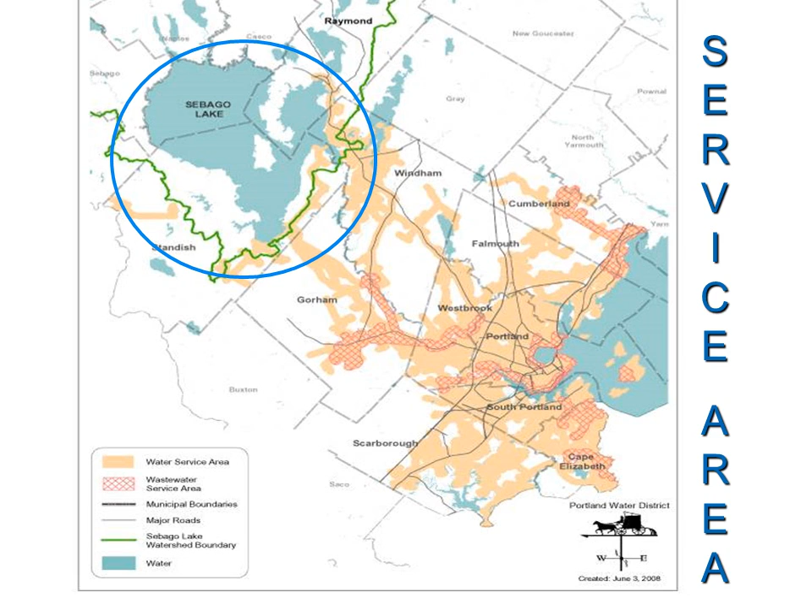Here's the source of our drinking water, the very, very pure and pristine Sebago Lake. We have one water treatment plant in Standish, noted by the red circle, and that water serves this distribution system that's included in this purple oval. The solid orange color is the water service area, and the hatched reddish color is the wastewater service area. We have one other small water system that is served by wells in Standish.

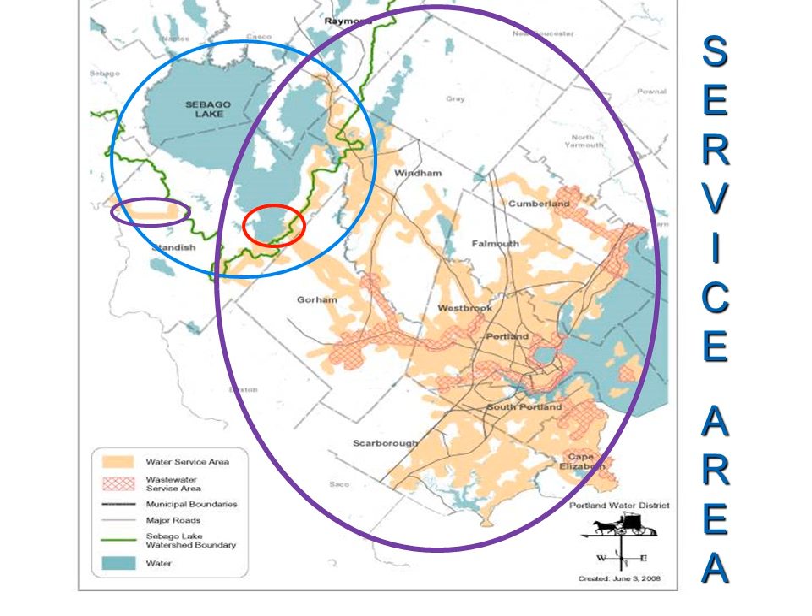Working from Sebago Lake, we start by protecting the lake to optimize our water quality. We monitor the water quality, we ensure the security around the lakefront, we inspect properties and potential contamination sites to make sure that the lake is protected, we educate, we acquire and preserve land, and we conserve the environment.

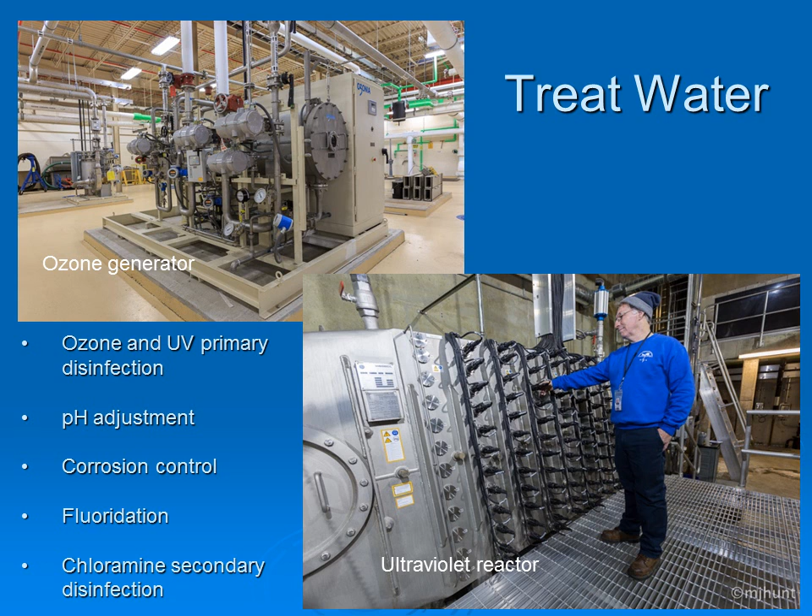We treat water at a water plant up by Sebago Lake. We have ozone and ultraviolet light as the primary disinfection. We adjust pH, control corrosion, fluoridate the water, and use chloramines as secondary disinfection. This is a state-of-the-art water treatment process that is run very efficiently and effectively and gives great value to our customers. Because Sebago Lake is so clean, we have a filtration waiver from the EPA, and that means that we can treat our water with these spectacular processes without having the expense of building and maintaining a water filtration plant.

I wanted to emphasize to you the enormity of the job that Portland Water District does to get the water from that lake to your tap. It's a complex system, it's challenging to see it and fix it, and it's costly for operating and maintaining it. So keep in mind, this is water for drinking water and for fire protection, and the fire protection is a very, very important part of what we do.

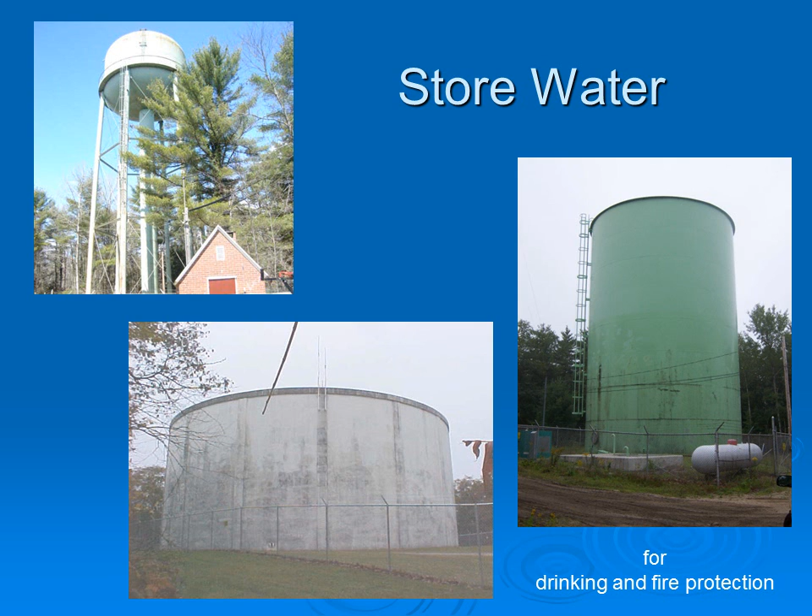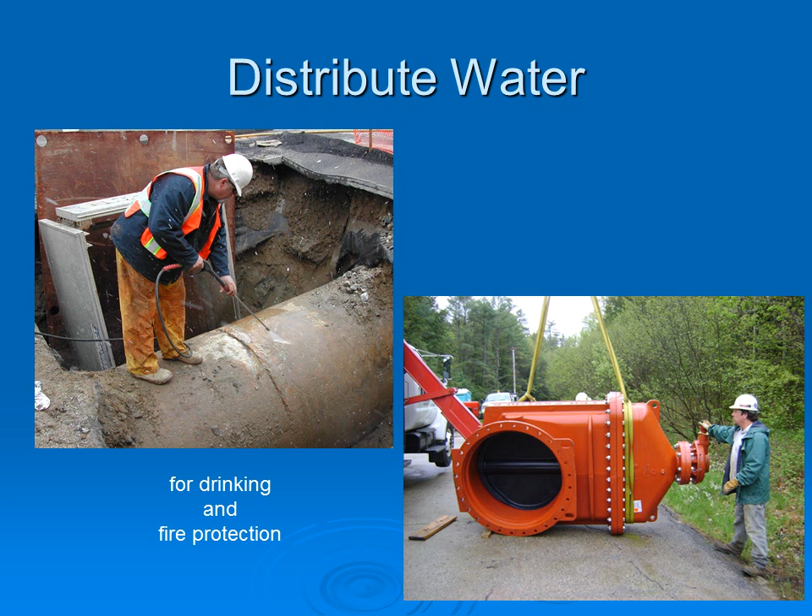The district has 6 booster pumping stations. We have 10 storage tanks, and we distribute water through 1,000 miles of water main, from large mains like this and large valves like this to smaller mains and smaller valves. The district operates and maintains 11,448 valves and over 5,000 hydrants.

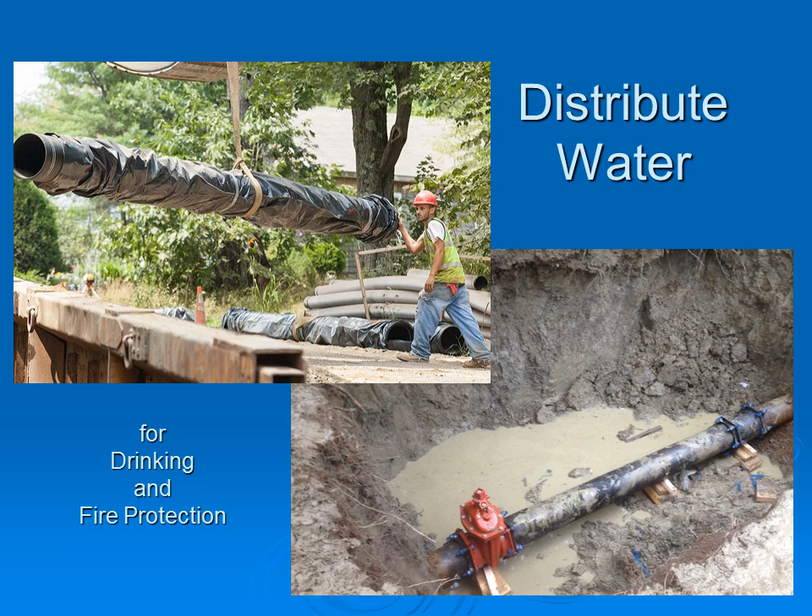This is a general map of the water distribution system. The darker, thicker pipes are the larger ones. They start up at the lake, work their way down into the various communities where the water mains get smaller and more dense. It's a very, very complicated system.

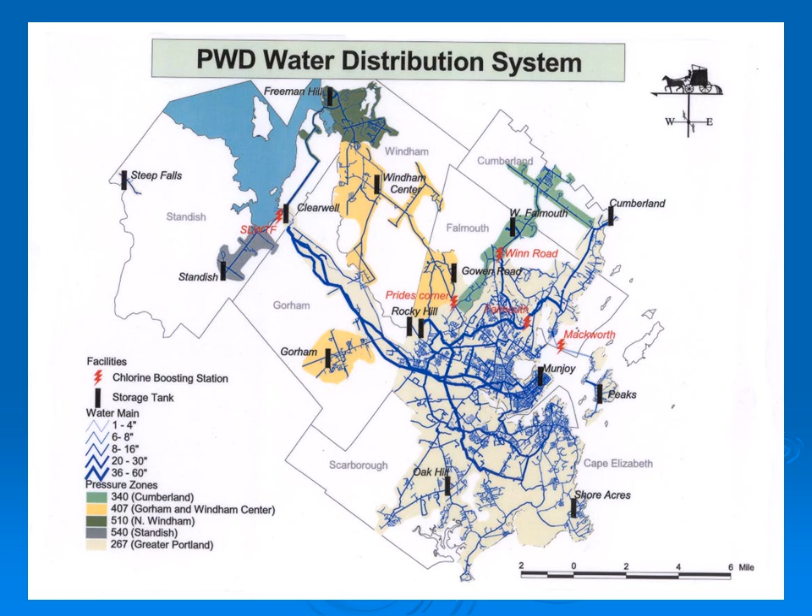Another important part of our work is that we ensure that the water served to the public is the highest possible quality. We have real-time monitoring of our treatment processes, regular testing throughout our service area. We do over 15,000 tests a year to ensure that the water quality is the highest that it can be.

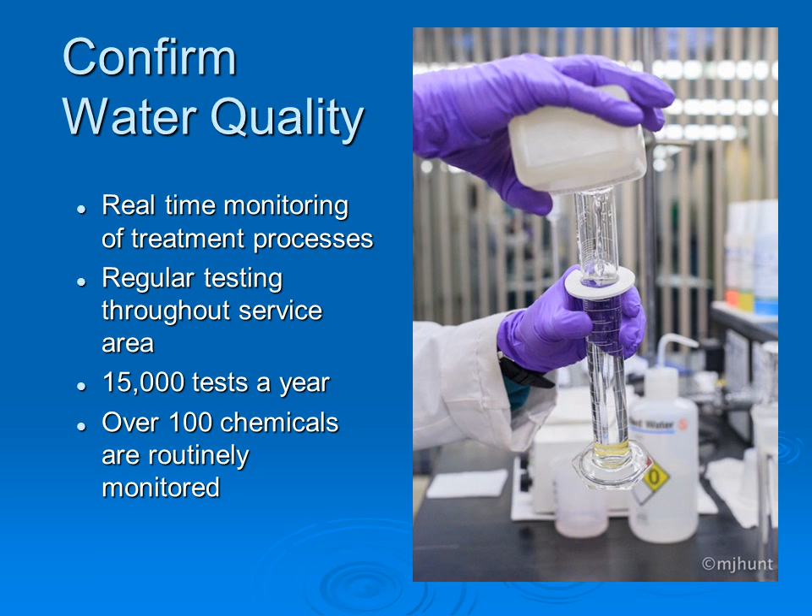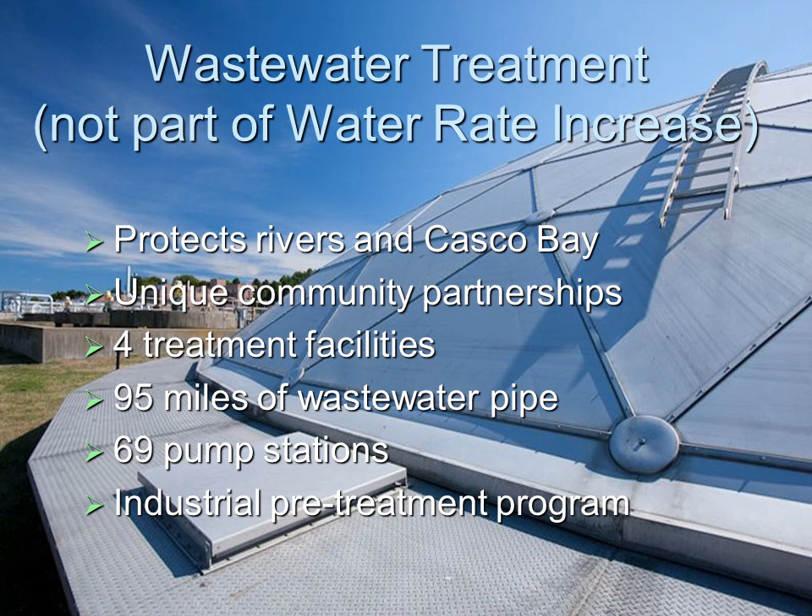So if we're looking for a water rate adjustment for 2019, here are the things that we think about that we want you to be able to understand. How much revenue will the district need to operate? How much do we want in reserves? How much water do we expect that customers will use? And then once we figure this out, how will we allocate this rate adjustment to customers and what will these be? So Portland Water District for 2019 will have a total of $25.2 million worth of expenses that we need revenue to cover.

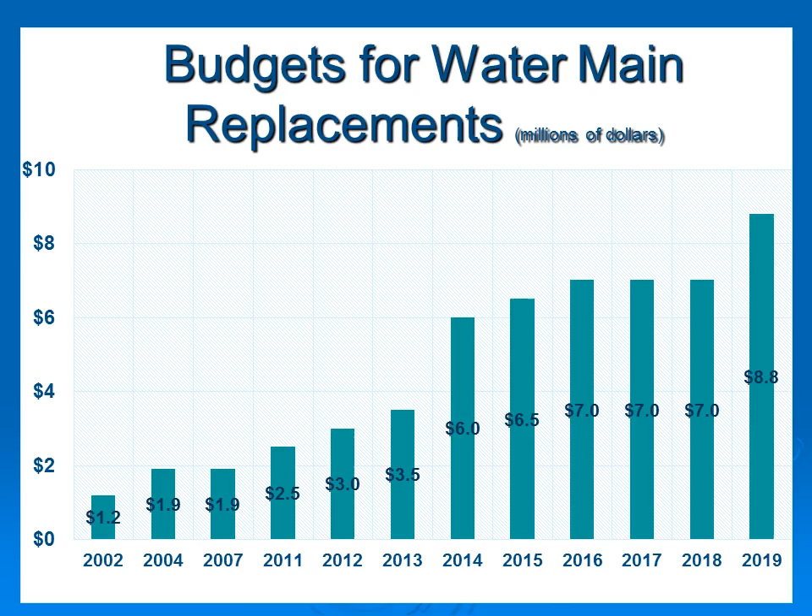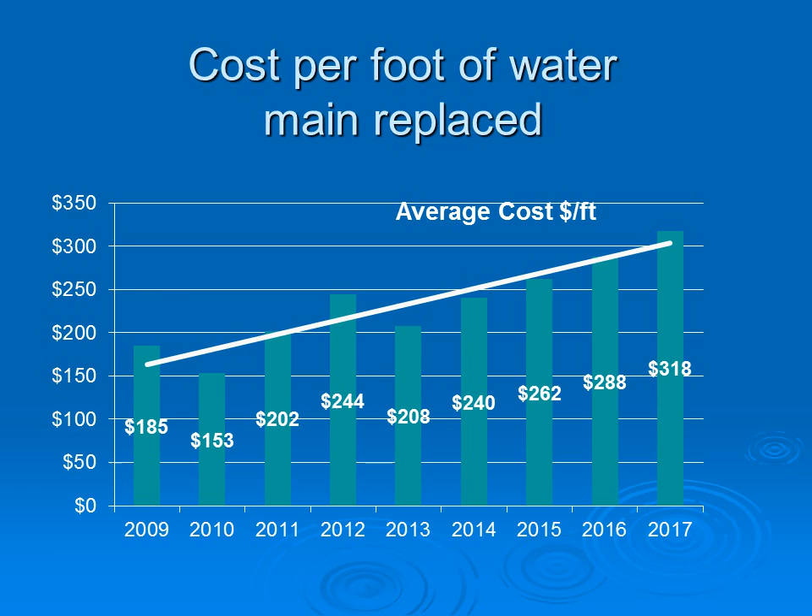Regrettably, the cost per foot of water main that's been replaced has been steadily increasing over the past dozen years, from $185 per foot in 2009 up to $318 a foot in 2017. So that's increases in labor and materials that are required to put water main in the ground. Of course, that means that the money that we're spending for water mains doesn't replace as many miles each year as it would if the price was stable.

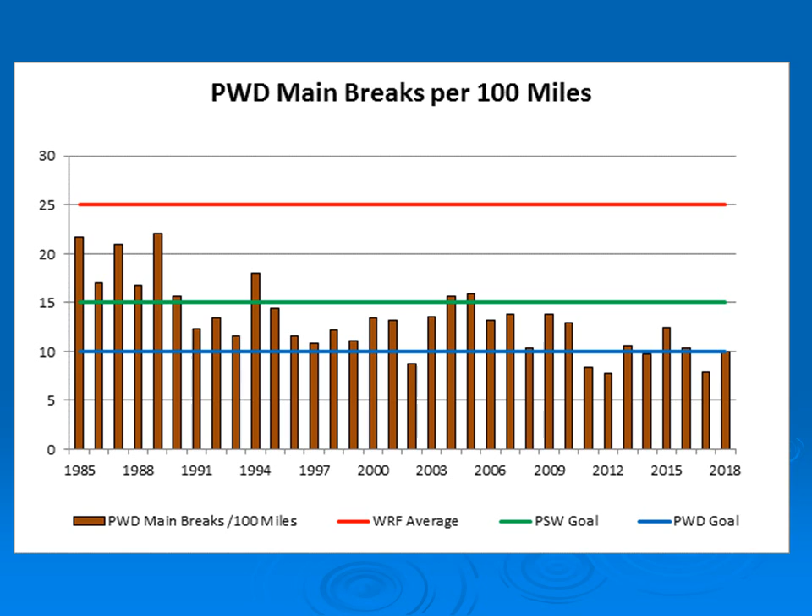However, the effort and the money that is being spent to replace those water mains is working. You can see that in general, these water main breaks per 100 miles, the brown bars, have been decreasing overall since 1985. And we stay way below national expectations and benchmarks, and our goal, which is the blue line, we're doing a very good job of getting to and staying at, and that is a combination of that good investment and good operation. So let's go back to this slide and look again.

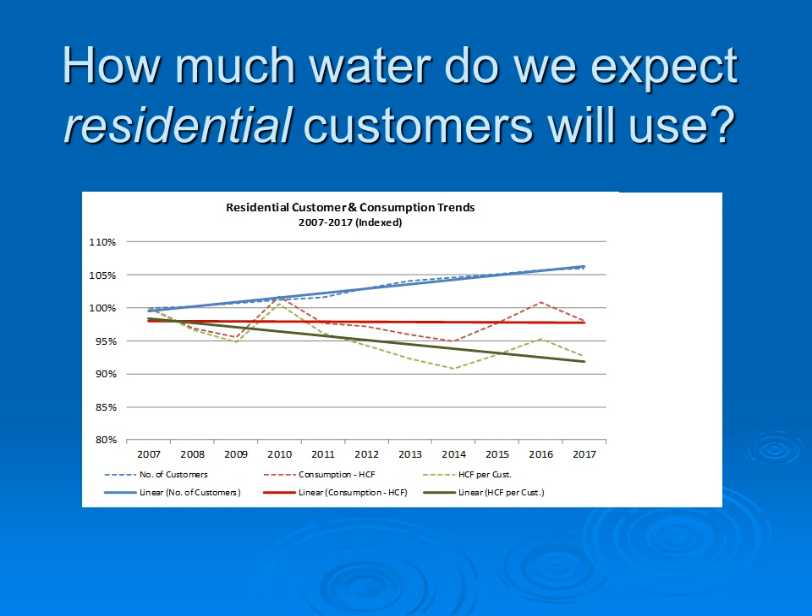In order to figure out how much water we expect customers will use in the next year, we analyze the core usage, the lowest water use for 3 months, and then we add on to it an estimated usage that represents seasonal and higher warm weather use. When we do that, we end up with a projection for 2019 of 8.4 million hundred cubic feet.

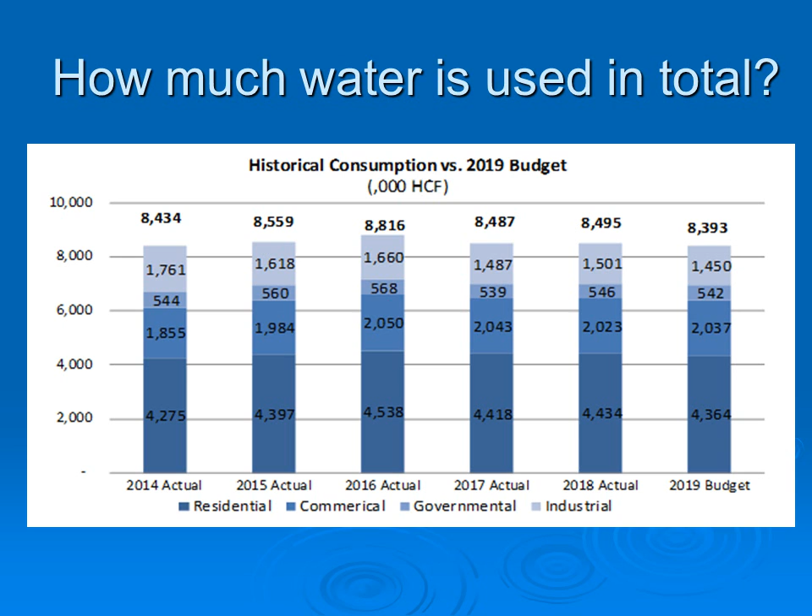You'll notice this is a graph from 2014 to 2019. The highest was 2016, which you will remember was a drought year. So the range in this graph was 8.4 to 8.8 million HCF over this time period. So we've used a conservative estimate of 8.4 million for our rate structure.

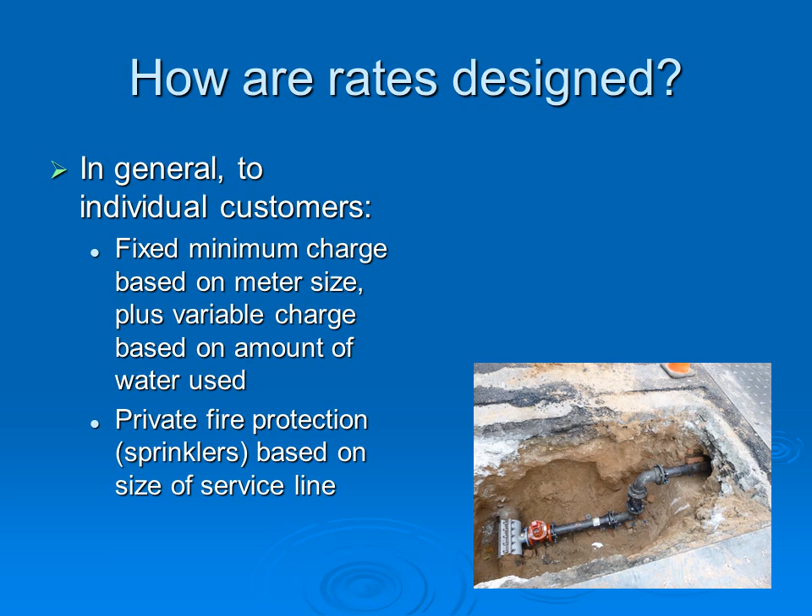So how do we design rates? There are different kinds of rates for individual customers. If you're one of our customers, you get a fixed minimum charge that's based on your meter size, and you also get a variable charge that is based on the amount of water that you use. Some residential individual customers will get private fire protection charges, which are basically sprinklers in their building, and the charge for that is based on the size of the service line.

Communities get a fire protection charge that is based on the hydrants and the water mains that are available for fire protection activities should they be needed. There are also rates for seasonal customers, and there are different rates for member and non-member communities.

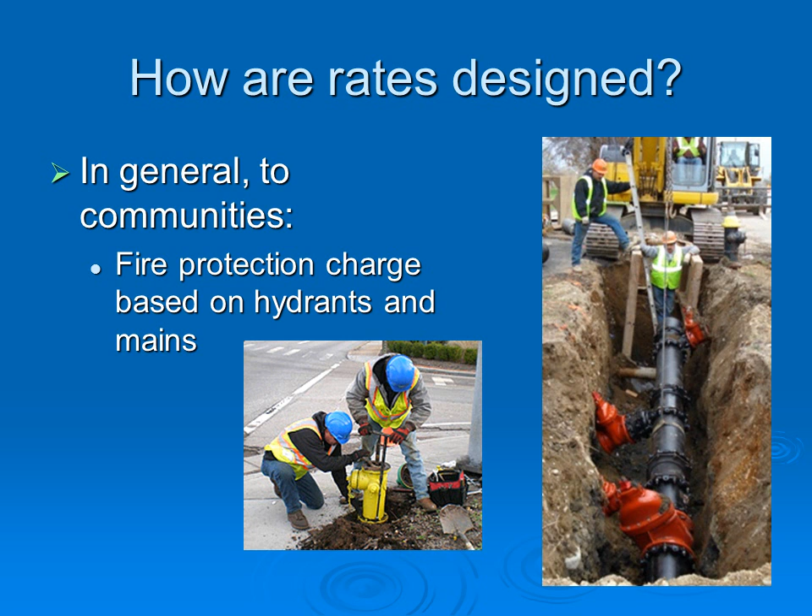So how will a rate increase be allocated? We know from a rate study some years ago that commercial and industrial customers generate less revenue than what it costs to serve them. So right now, residential customers are paying more than their share of the cost to serve them.

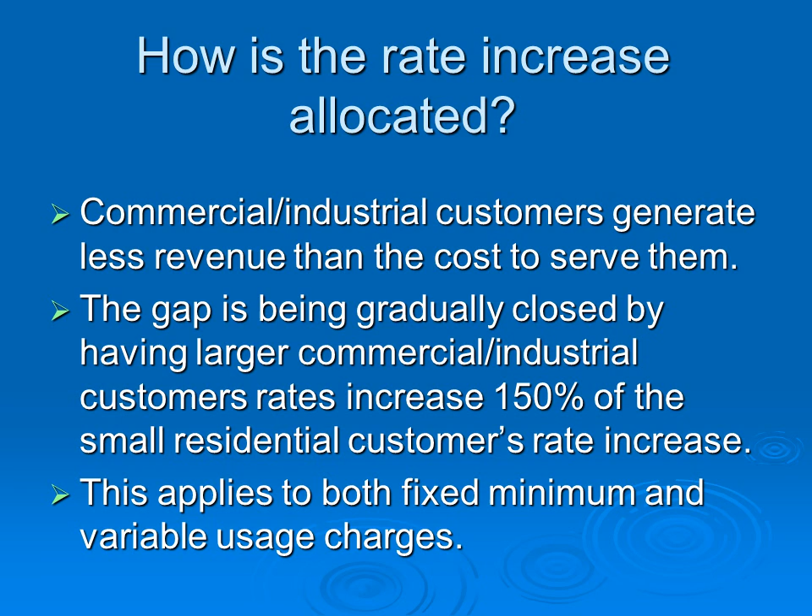This gap is being gradually closed by having a larger rate increase to commercial and industrial customers than to the residential customers. And over some period of years, this gap will close and all of the customer classes will be paying for the cost that it is to serve them. So this higher increase to the larger customers applies to both the fixed minimum and the variable charges.

What rate increase then are we requesting to cover these revenue needs? Overall, it's a 4.4% increase. It's 4% to residential, 4.9% to commercial, and 5.9% to industrial customers, like I just discussed. The commercial and industrial are getting a higher percentage increase than the residential. The seasonal customers, public fire protection, and private fire protection all have a requested 4.4% increase.

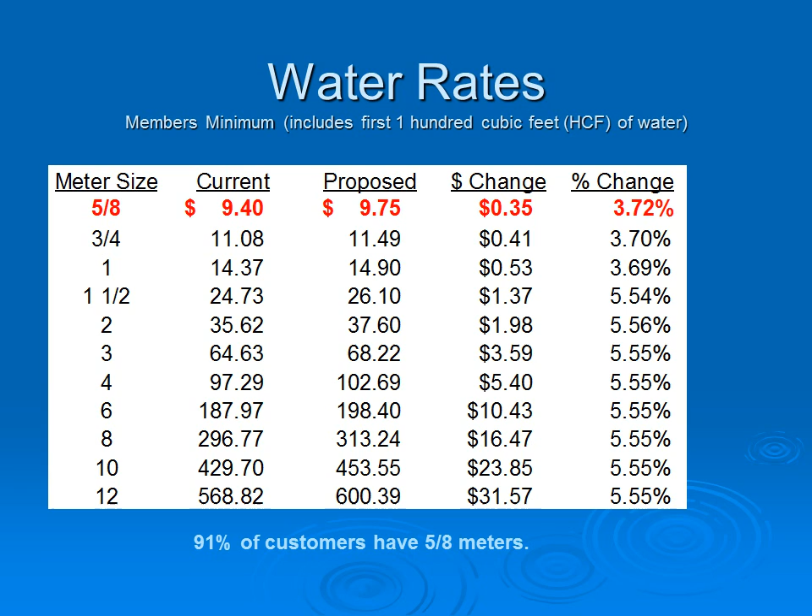So here are some of the details of how those numbers break out. This is a chart that shows the change for the fixed charge, based on the meter size. The meter sizes range from 5/8 inch to 12 inches. There's a column here that shows the current. Most residential customers have 5/8 inch meters, so currently they pay $9.40 a month. That's proposed to go up to $9.75 per month, which is an increase of 35 cents or a 3.72% change. You can see that as the meter sizes get larger, the percent change also gets larger.

This is describing how the water usage charges, the variable charges per 100 cubic feet, or HCF, are going to go up. Right now, a typical residential customer uses 700 cubic feet, so they would fit into this red line of between 1 and 29 HCF per month. Currently, they pay $2.35 per HCF. It's proposed to go up to $2.44 per HCF, which is 9 cents or 3.83%.

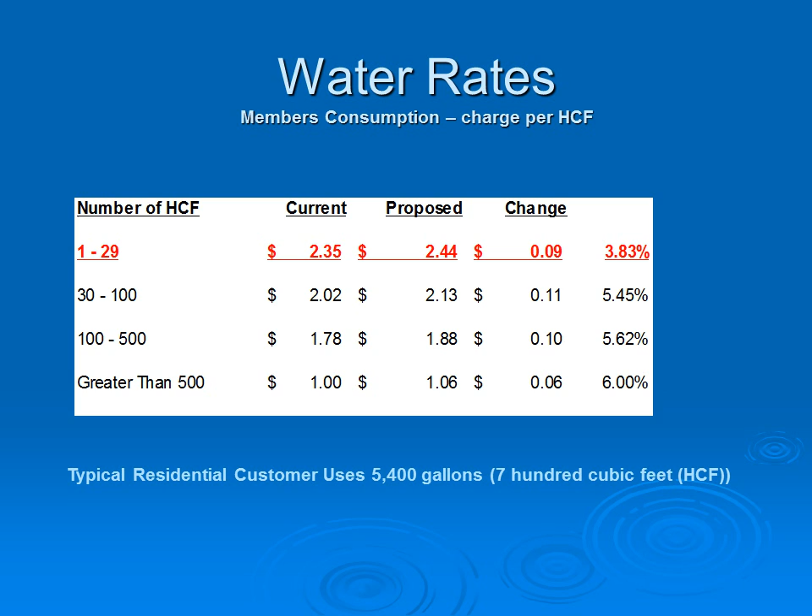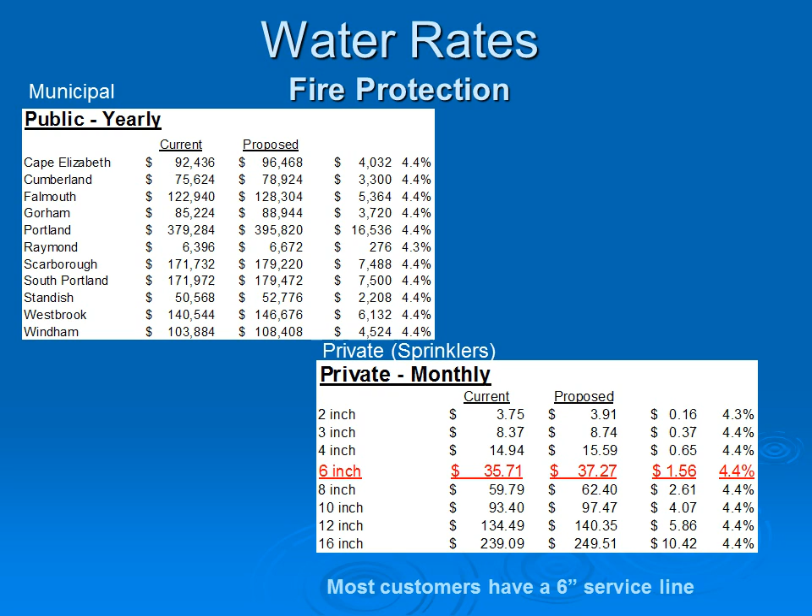Seasonal water rates are going up 4.4% across the board for all meter sizes. And fire protection rates also are going up 4.4% across the board. Again, public fire protection is charged to municipalities, and it's based on the number of hydrants and water mains that are available for fire suppression use. And private fire protection is charged to customers for sprinklers. Most of those customers that have private fire protection have a 6-inch service line.

How does Portland compare with other communities and nationally? $367 per year right now is the annual bill for a customer that uses 1,000 cubic feet. If this 4.4% rate increase goes into effect, that $367 will increase to $381 per year. This compares nationally, all the way over to the right side of this graph, to $504 per year, the national average for 1,000 cubic feet of water.

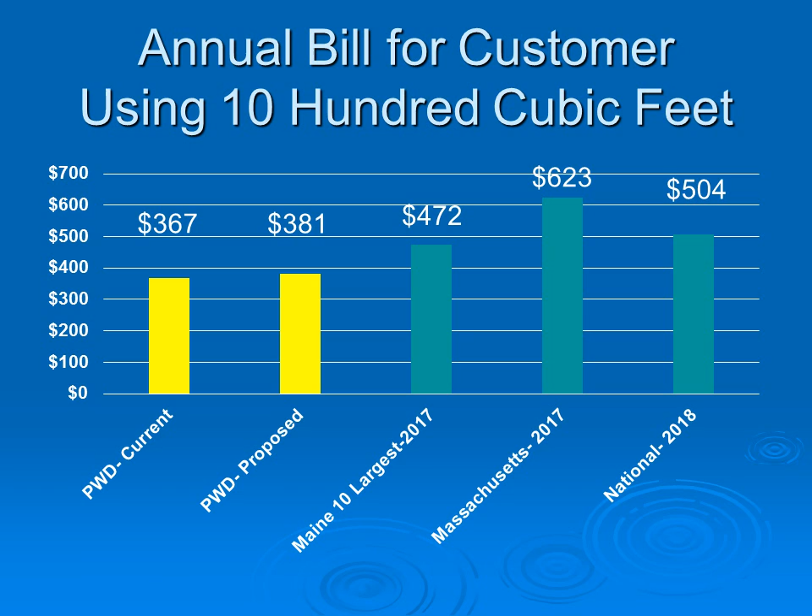The latest data that we had regionally was from Maine from 2017, that's $472 a year, and Massachusetts, also from 2017, $623 a year. So based on this, you would be able to confidently conclude that Portland Water District rates are very competitive and very favorable compared to these benchmarks.

Quick note that the non-member rates, so that is for Standish and for North Yarmouth, are changing by approximately the same percentages, and we do have a low-income program, and that minimum rate will go up slightly from $2.35 to $2.44 per month.

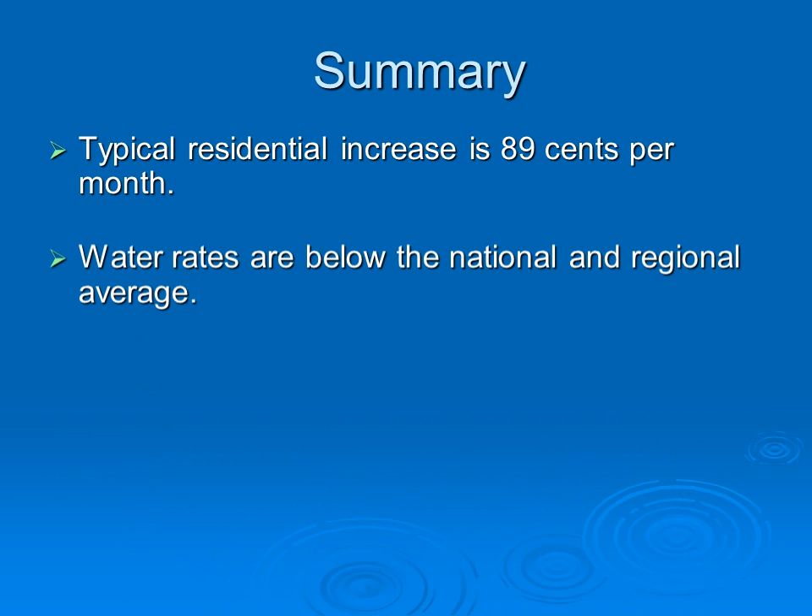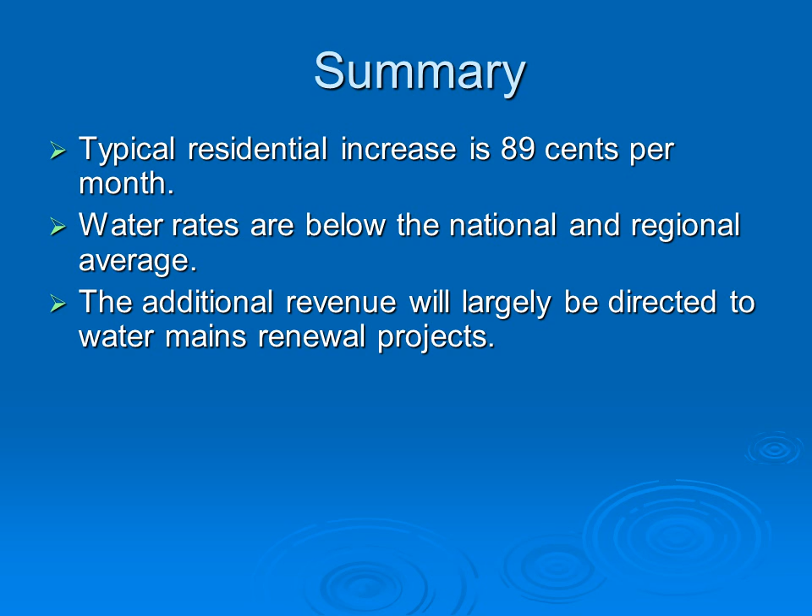So, the typical residential increase, 89 cents per month. Water rates are below the national and regional average. This additional revenue will largely be directed to water mains renewal projects and the capital finance costs that are required to fund those. So without this increase, we'd have a deficit of about $1 million in 2019. With this increase, expenses will be met and there will be $127,000 to be allocated to the Water Main Capital Fund.